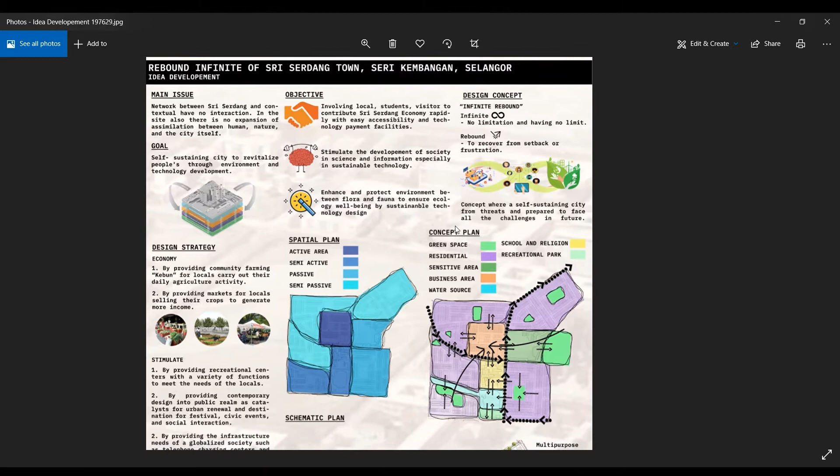So we go to the design concept. My design concept is Infinite Rebound. Infinite means no limitation, having no limits - that's the definition for infinite. Rebound means to recover from setback or frustration. When these two words combine, it produces a new concept where a self-sustaining city recovers from threats and prepares to face all challenges in future. In this context, Sri Serdang can stand by itself.

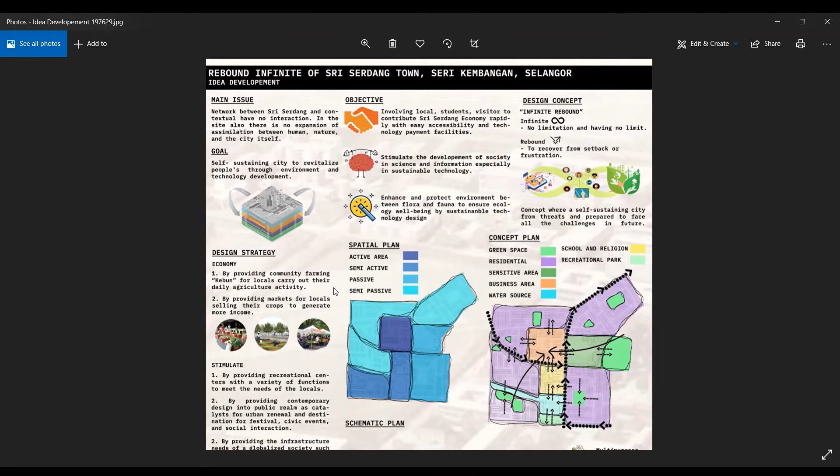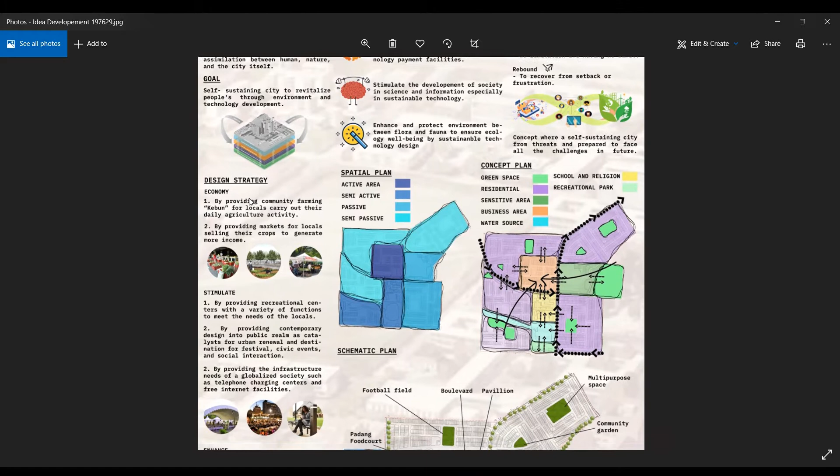So how do we go about design strategy? As I said earlier, the first objective is involving local students and visitors to contribute to Serdang's economy. So the keyword is economy, by involving all people.

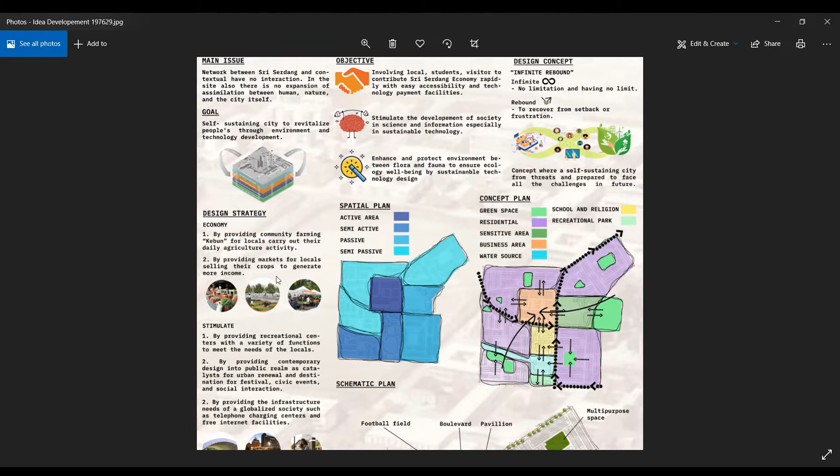How? By providing community farming, kebun, for locals to carry out their daily agriculture activity. Second, by providing markets for locals to sell their crops to generate more income. As we can see here, at Sri Serdang, selling crops happens - locals sell their crops and gain more income, then they can do food exchange. So this is what happens here.

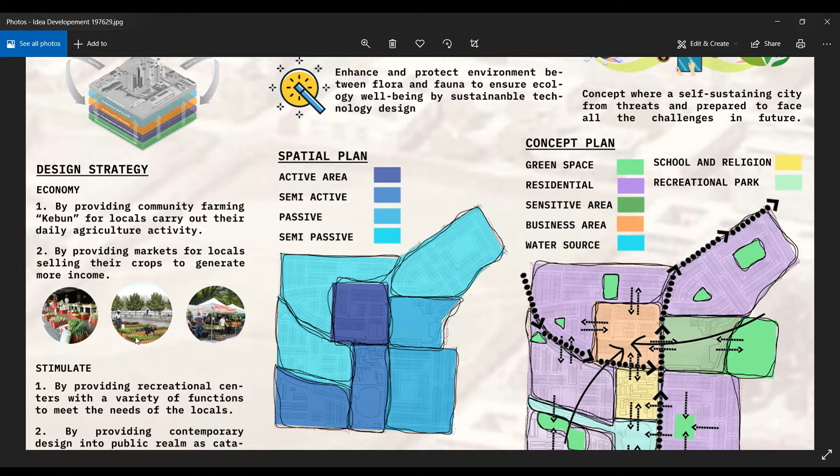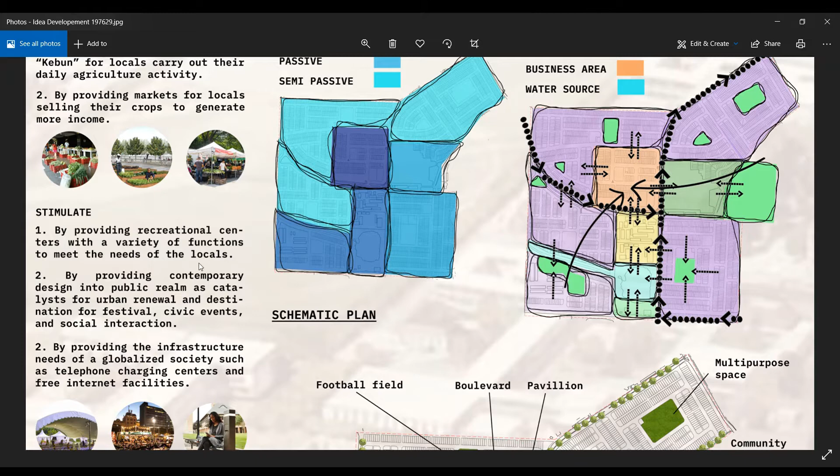The second strategy is stimulate. How do we want to stimulate the people and environment at Sri Serdang? By providing a recreational center with a variety of functions to meet the needs of the locals. The locals are not only the people at Sri Serdang, but also the students of UPM are locals for Sri Serdang town.

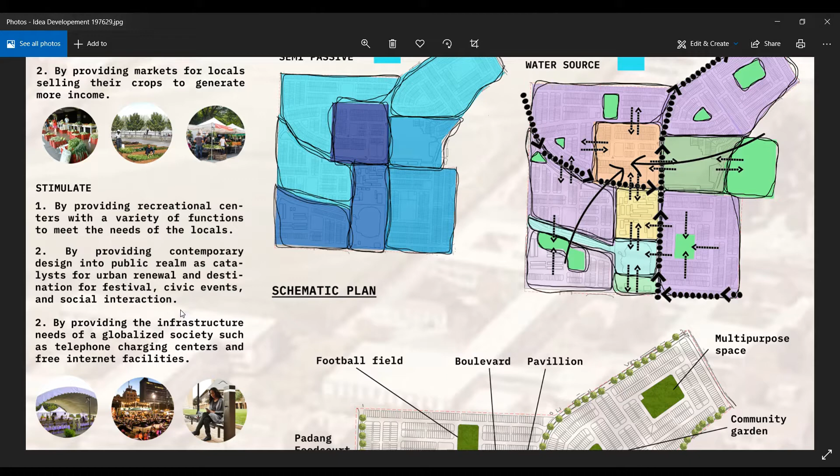Second, by providing contemporary design into public realms as a catalyst for urban renewal and a destination for festivals, civic events, and social interaction. Third, by providing the infrastructure needs of a globalized society, such as telephone charging centers and free internet facilities.

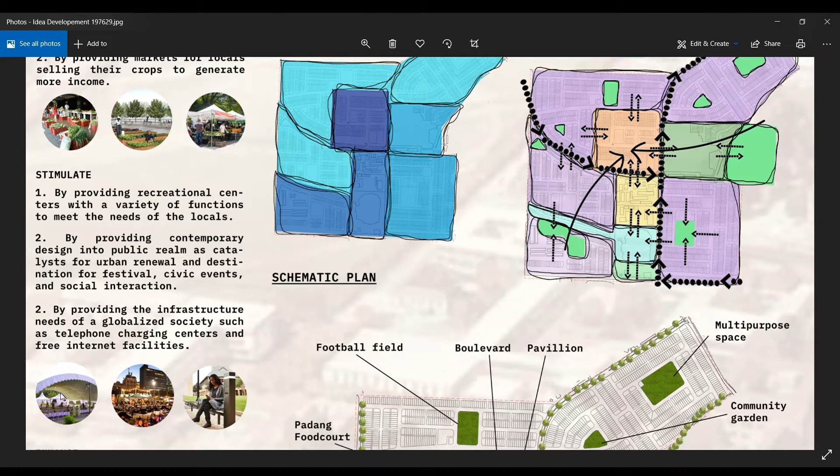As we can see here, by providing a recreational center or any place designed with a variety of functions, a variety of activities can happen at the site. As we can see, there's a wedding, a dinner, and this picture shows the charging center where people can charge their phones, so they no longer need to worry about their phone battery.

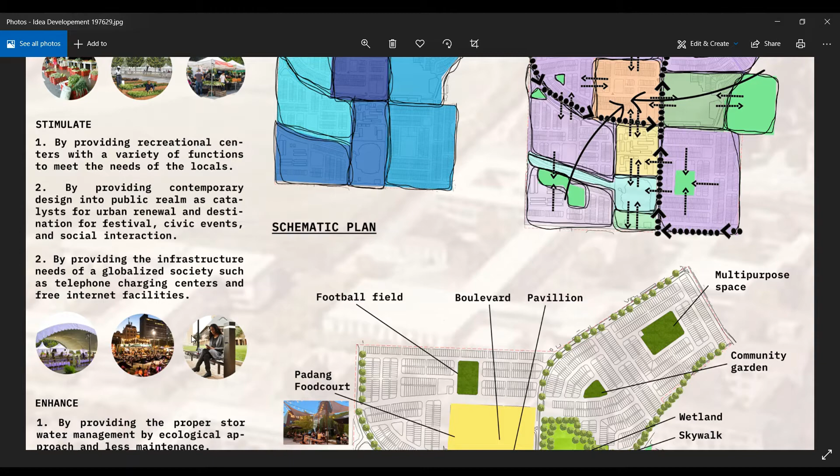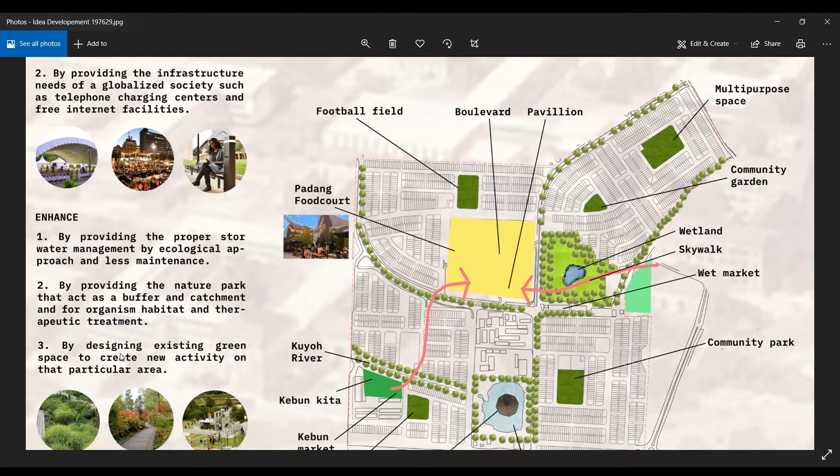The third design strategy is enhance. How do we enhance Sri Serdang? By providing proper stormwater management through ecological approach with less maintenance. Second, by providing a nature park that acts as a buffer and catchment for organism habitat and therapeutic treatment. Third, by designing existing green space to create new activity in that particular area.

So that's for my design strategy. Now we go for the plan. There are four groups here, four areas: active, semi-active, passive, and semi-passive.

The most active area is at the commercial area itself, at Sri Serdang town. The semi-active area is below here, where there is a school and the Tasik Sri Serdang, and here also students go to the flats to carry out their activities such as printing their stuff, etc.

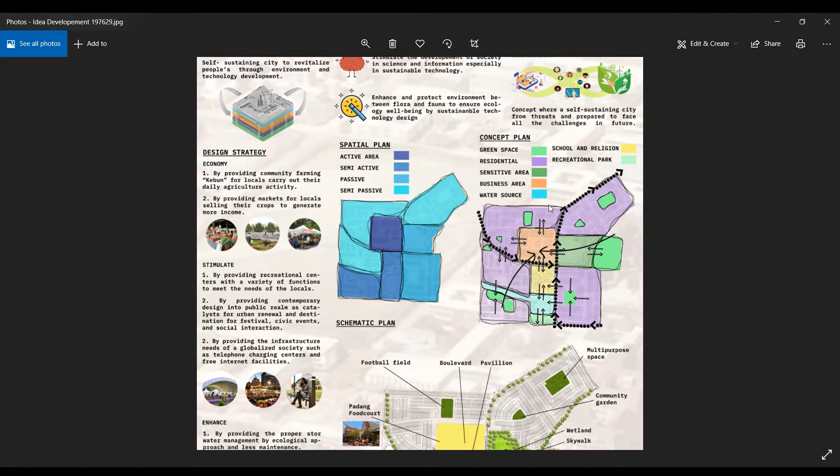This is my concept plan. There's a green space, residential sensitive area at this site, behind College 10, UPM, and on the right side the business area of Sri Serdang. Here there's also a water source, school and religion, and a recreational park at the Sri Serdang Lake.

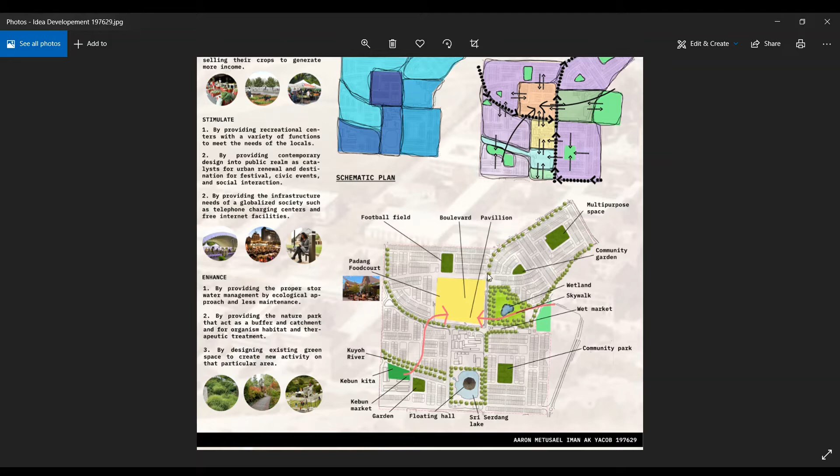This is my schematic plan. Here I provide multi-purpose space, small scale community garden, a wetland, a skywalk - skywalk meaning elevated linkages, or elevated pedestrian bridges. This is the wet market, community park, Sri Serdang Lake, and a floating hall at the middle of Sri Serdang Lake, garden, kebun market, kebun kita - where I'm planning to put a big scale agriculture activity, Kuyoh River, and this is Padang Food Court, football field, boulevard, and pavilion. That's all for the schematic plan.

Okay, we move to the master plan.

Okay, now for the master plan. This is my master plan, Reborn Infinite of Sri Serdang Town. Let's take a closer look.

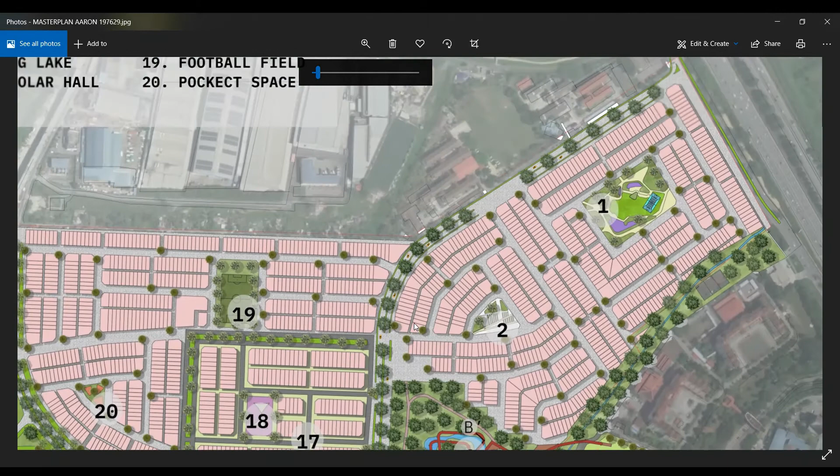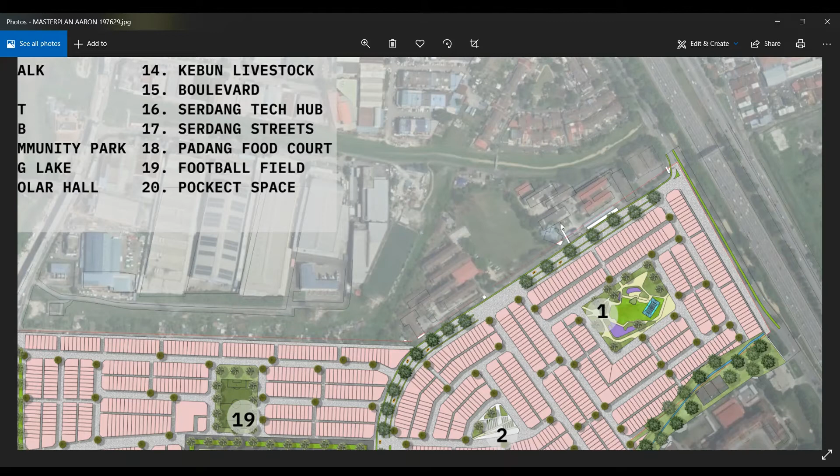First is a multi-purpose space, where a lot of activities happen. They can do aerobic activity, they can play. There's a children's garden here, a playground. This place is where they can do aerobic activity, and this is a volleyball court mixed with a basketball court. This is a jogging track here.

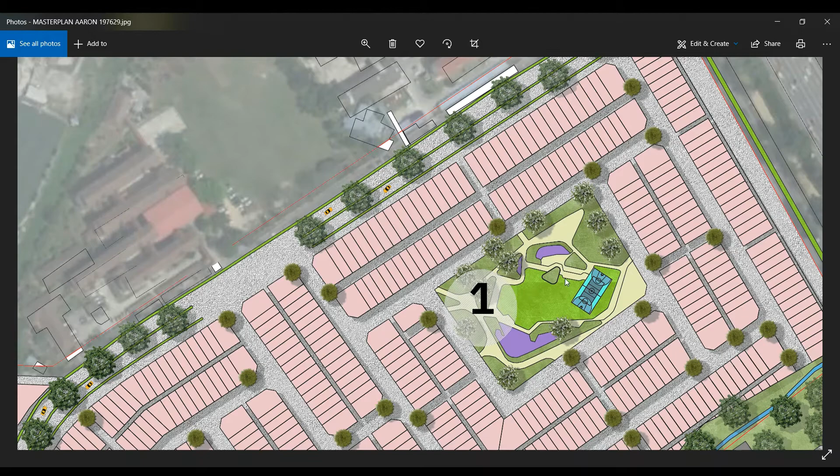Go for the second one: small scale farming activity here, small scale for this residential area.

Number three is wetland. Where does the water come from? The water comes from the river behind Tun college here. This is Tun college.

Number four is fiber skywalk. The fiber skywalk goes from Tun college field, crosses through this lake, this wetland, to Switzerland.

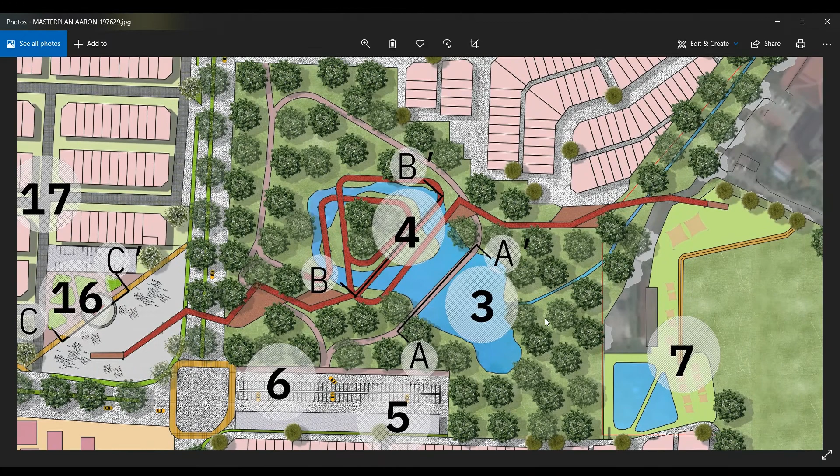What is the name of this area? The name of this area is e-learning center park. It's not just a place, not just a sensitive place. It also can become a place where students or local people want to learn or carry out research, such as learning about animal habitats, insects, or plants like riparian plants, or the ecotones. They can do research and development at this site. That's why we name it e-center park.

Number six is the car park lot. This site, this place, provides car park for people who want to go to e-center park, go to Sri Sedang commercial area, or wait for children from this school. Number five is wet market.

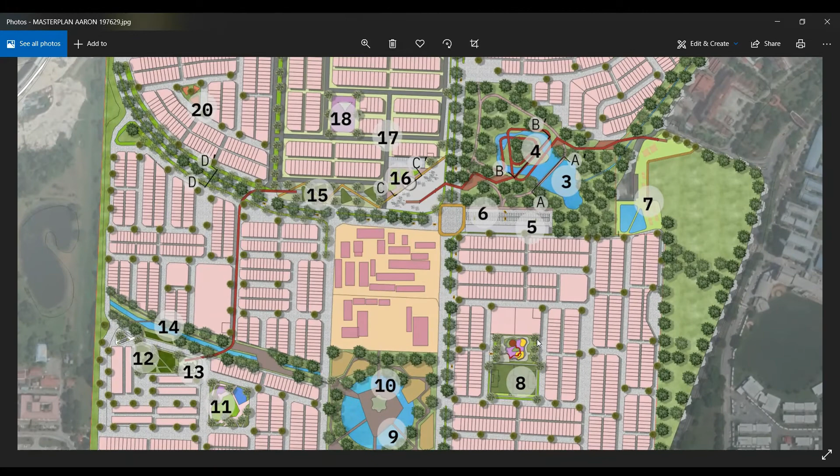Number eight is browser community park. At this site, it's kind of a community group where they can do a learning session. It's not a center for learning, but a place where they can do a class - a classroom at the park here. The other side is the football field. Why do I say this is browser community park? Because there's a kindergarten here, this side has secondary school and primary school, and UPM students also can use browser community park as their platform, their room to study.

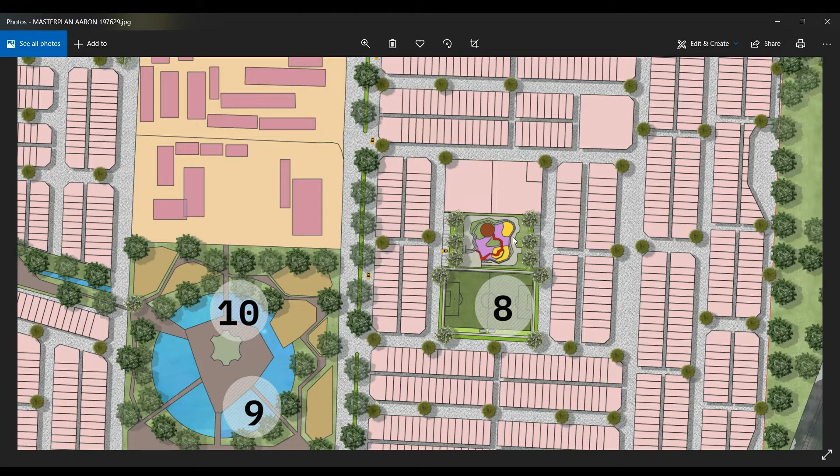Number nine is Sri Sedang Lake, a recreation area where recreational activity occurs. At the middle of Sri Sedang is the floating hall. The function of the floating hall is for people to do a lot of activities such as a wedding event, or any variety of events.

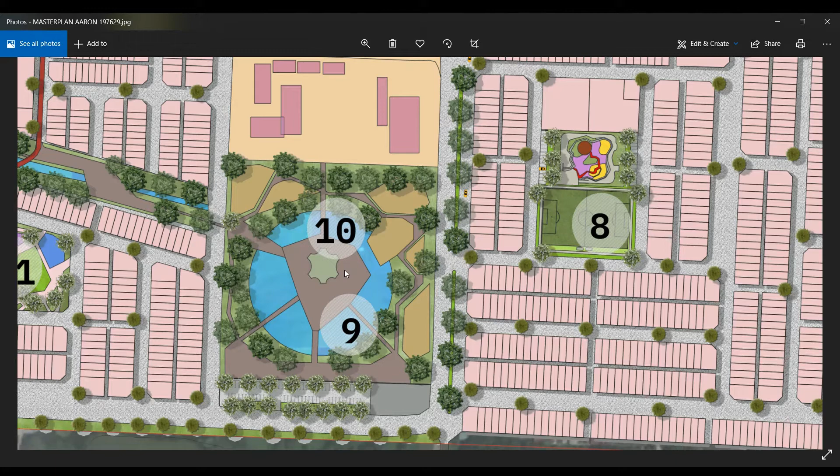Eleven is just a playground, just a garden. Thirteen is e-kebun, standing for economic kebun. At this site, people come and buy local crops. The local crops are produced here at twelve - this site is where local people produce their crops, selling their product to citizens, outsiders, or students.

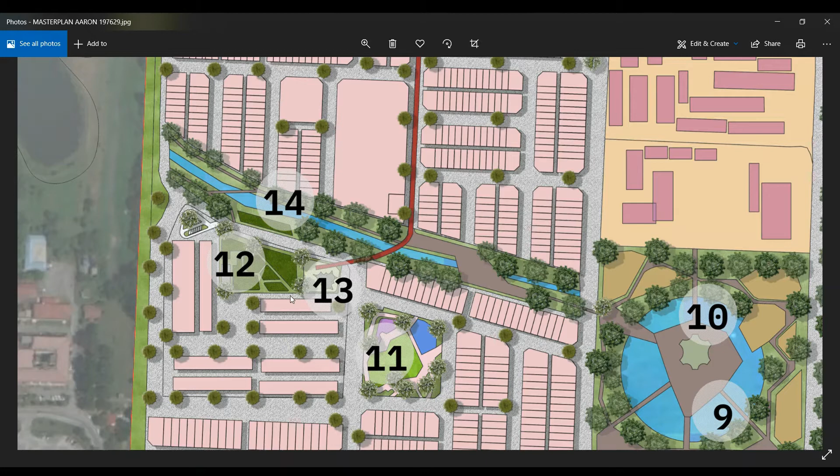It's near to main campus UPM here, so people from UPM can access this site easily and buy crops. They don't need to go to the wet market - they can buy vegetables from here.

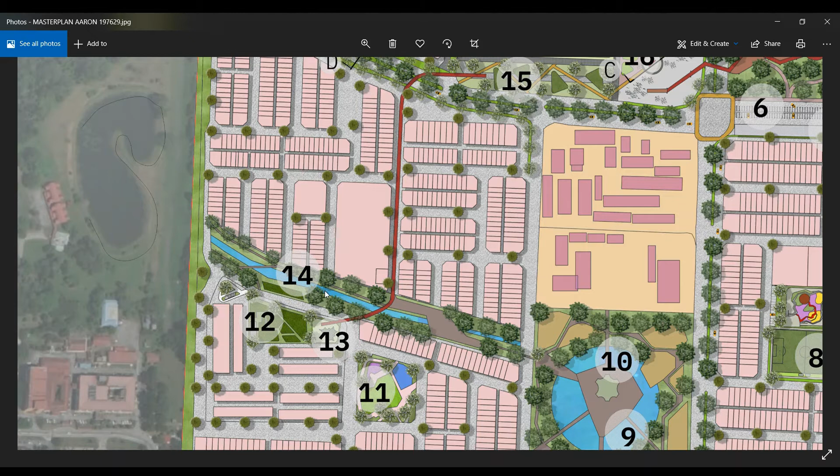Fourteen is a place for livestock such as chicken and ducks. People here want to raise poultry, chicken or ducks, or they can farm fish, because it's near the river, so people at this side can farm fish.

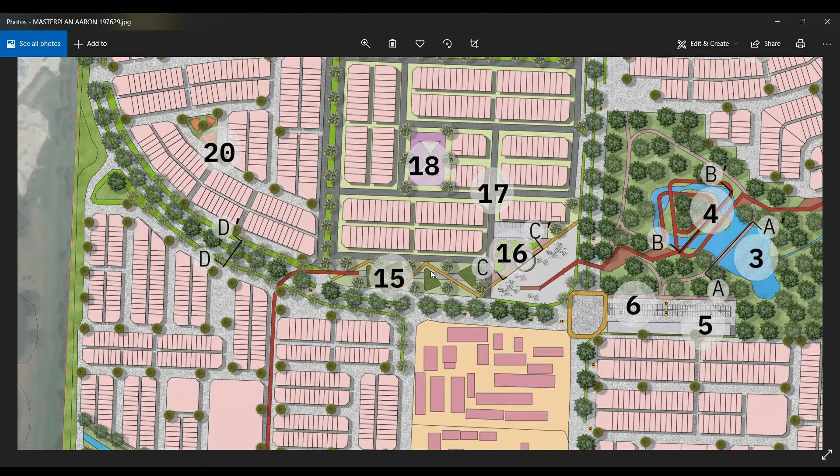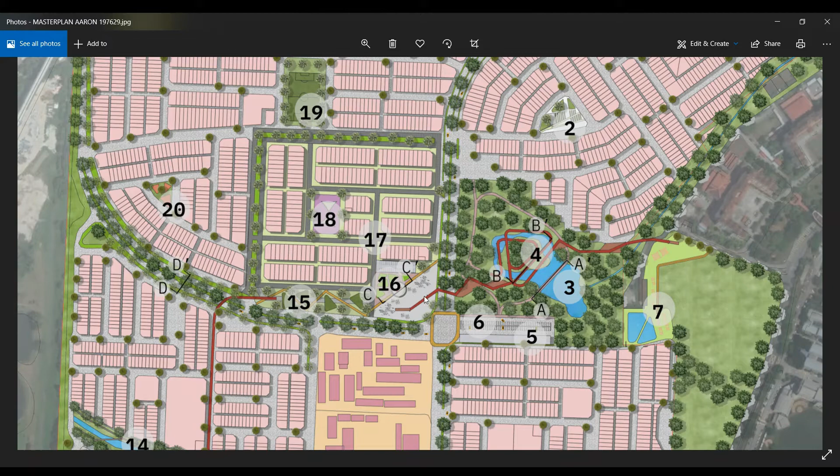Fifteen is the boulevard. Sixteen is Serdang Tech Hub - this is the interesting part. This site is the main attraction for people from outside Sri Serdang or Sri Serdang itself. This is one of the landmarks for Sri Serdang.

Seventeen is Serdang Streets, eighteen is Padang Food Court, nineteen is Football Field, and twenty is Pocket Space. That's all for my master plan.

We move to perspective and section.

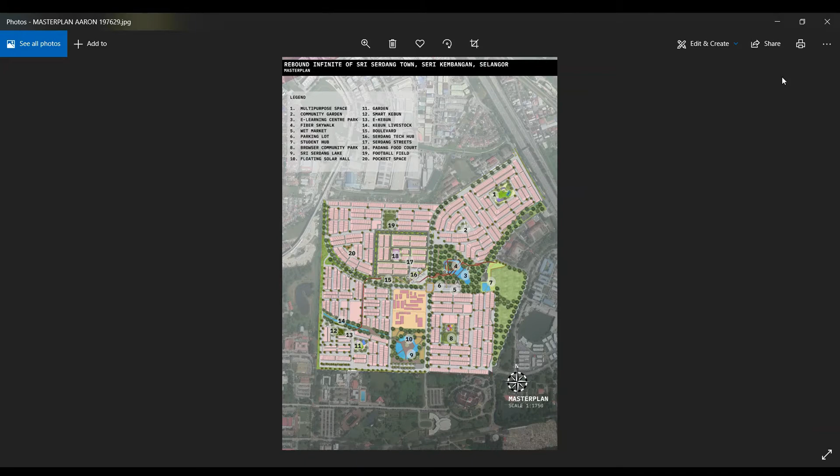About this perspective, technology-based education is now a necessity for everyone. The e-learning center park is not just a park, it is a research and study center for those interested in other living organisms. So it's not just a wetland, not just a park, it has a function for other users.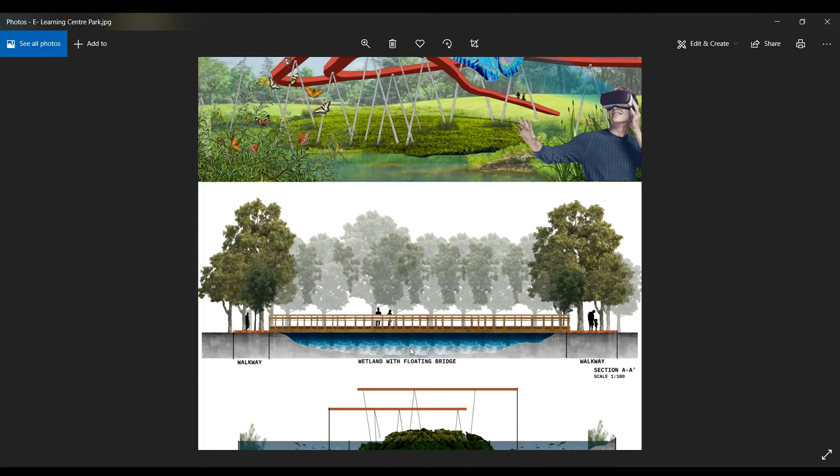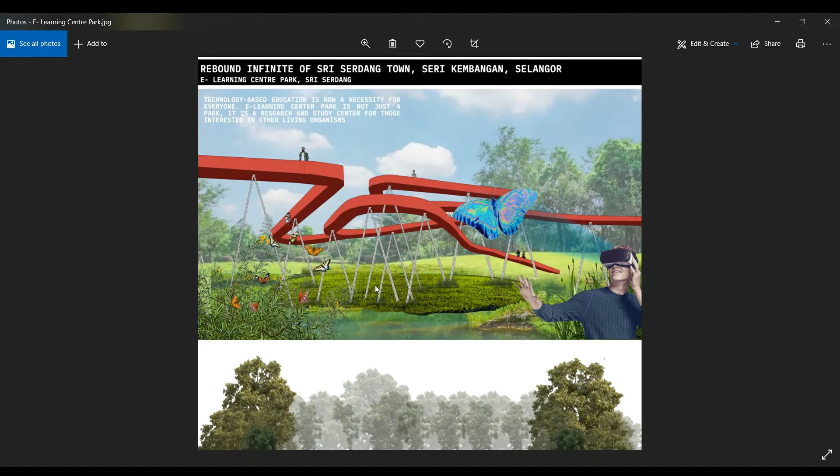This is the fiber skywalk. It shows the height of the fiber skywalk, and this is the island wetland just now here, in the middle of the lake. This is the riparian buffer.

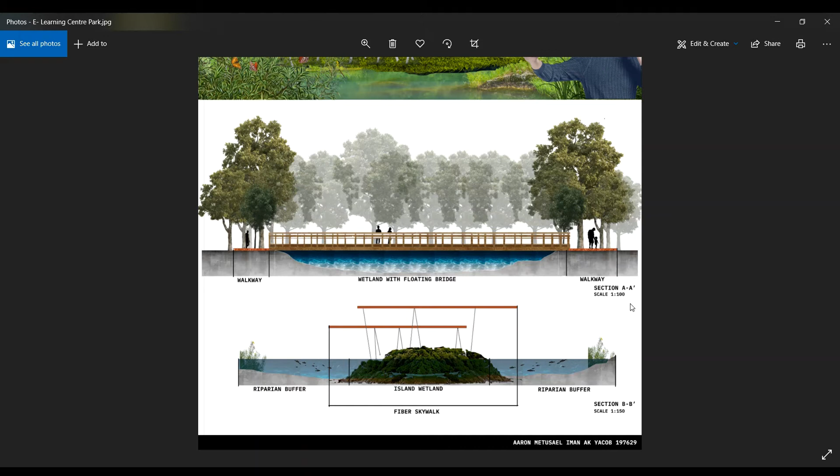This is for section AA, and this is section BB. That's all for the e-learning center park.

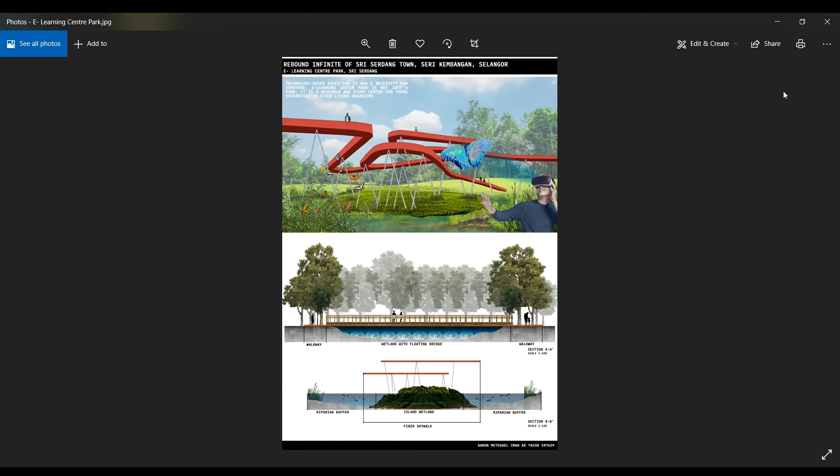Let's move to the next, move to the last board. So this is my last board, at Sri Serdang. This is a perspective, section, and elevation.

So this place is Serdang Tech Hub. Let's get closer - this is Serdang Tech Hub. Just now I showed it at the master plan. Serdang Tech Hub is a place where there's a lot of activity, it's an open space.

This is the landmark of Sri Serdang. The landmark shows the meaning of this landmark - it shows a new era, a new era, like a technology era.

Resilient and responsive infrastructure, new forms of landmark and communication, adaptive building technology, and a data-infused public realm with a focus on innovation in arts and entertainment are hallmarks of the district. Serdang Tech Hub brings you to the new world called cyber.

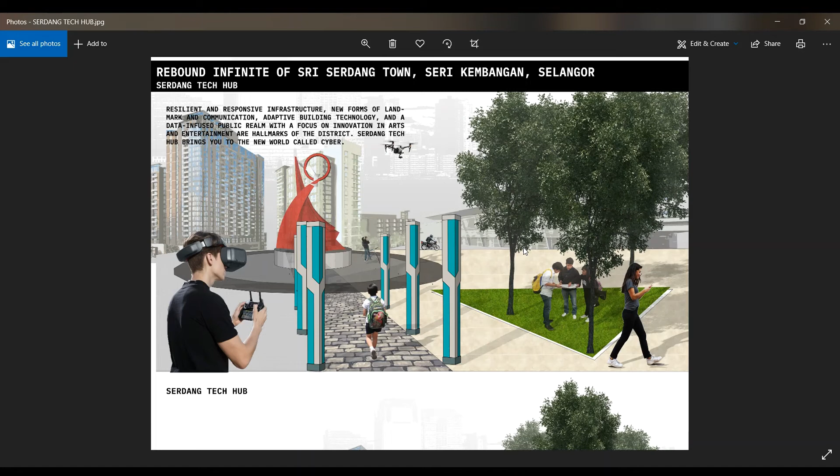And yeah, so this is Serdang Tech Hub. This is the section.

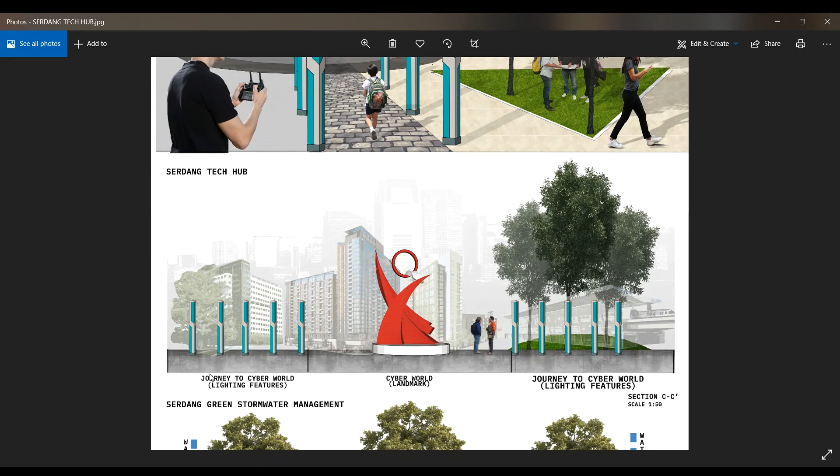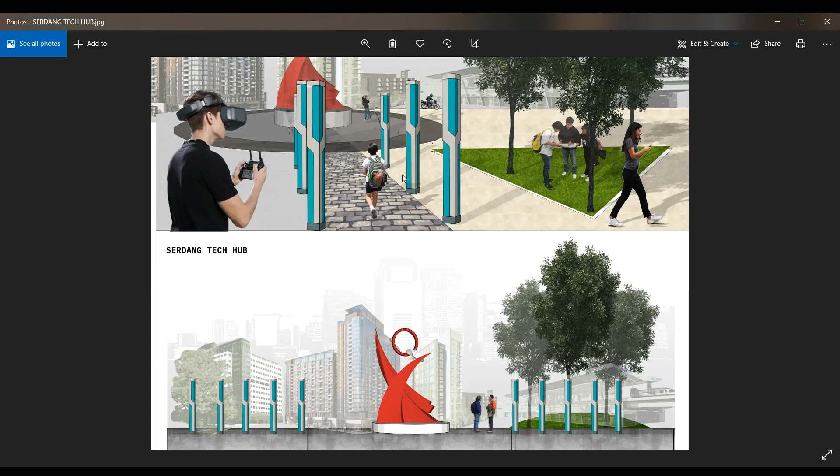Journey to cyber world - this column shows a pathway. People who walk through this column, actually this is the lighting feature. So people who walk through this column, it's like they go to the new world, to the new dimension.

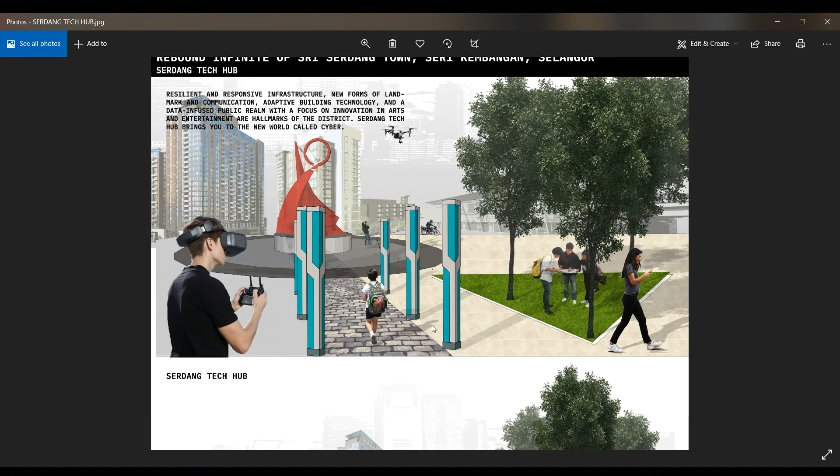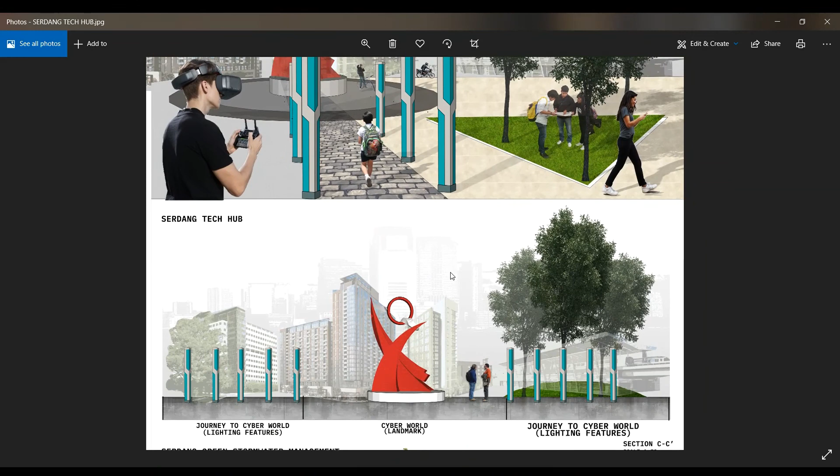This landmark shows that it's a gate, a gate to access the cyber world - this imagination. So this is journey to cyber world, lighting features, and then this landmark, so-called cyber world.

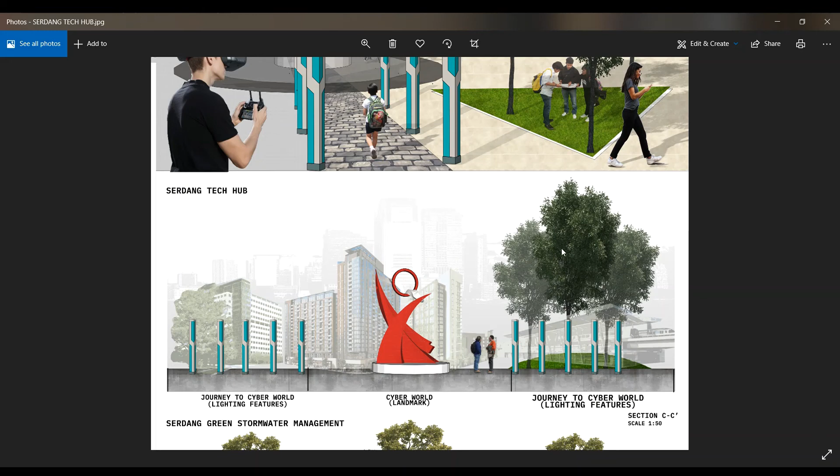Okay, so this is also journey to cyber world. This is a small green area here. So this is one of the methods.

This is one of the methods on how to prevent flooding at Sri Serdang, by using stormwater management. This is runnel pervious pavement with swale.

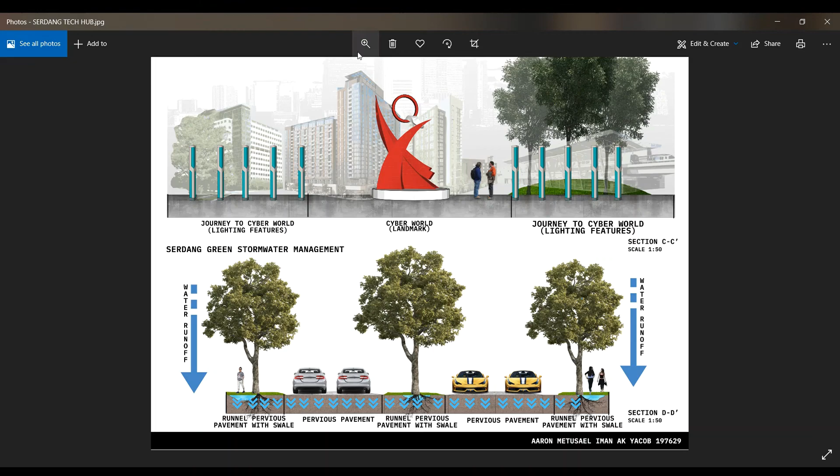This is the swale, where the water runs off from the streets, from the buildings. So this is runnel pavement - runnel pervious pavement with swale, and this is pervious pavement.

By this design, it removes road pollution from the first flush of rainfall and redirects stormwater to irrigate the adjacent street trees, with only excess water flowing into the traditional storm drain system. This design reduces peak stormwater runoff and improves water quality.

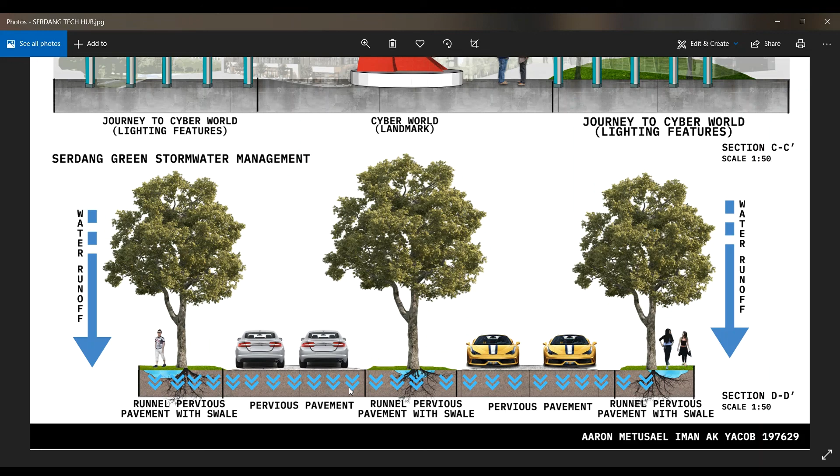It improves water quality and reduces demand for potable water for irrigation of the streetscape. So this is the function of the green stormwater management at the street in Serdang.